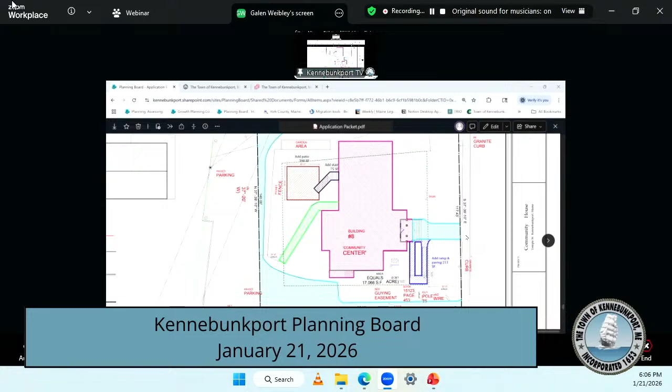So the west is towards the River Green, towards South Church, up towards Church Lane. If I'm looking at the front of the community center, the post office is behind you. So you're looking at the front of the community center. The west side is where the right-of-way comes up from the parking lot, and the east side is there by the Kennebunkport Inn. So we're talking about the community center, not the church itself. Correct, just wanted to clarify that.

This is their proposed layout for the new ADA ramp right here, and you'll see they have this patio area back here. Where's Temple Street on this again? Temple's right here, where the cursor is over on that side.

So essentially the stairs, the new ramp is gonna be right out in front. Correct, so this is the existing layout now - they have a lot of walk space, and they're substituting that for the patio space you saw in the second spot. But the ramp they currently have is to the north, right here, and they're making it more conforming by bringing it in through the setbacks on this side.

I know the memo from the planning department does have a question about clarifying the pluses and minuses on the coverage, but it looked like to the first order, it's a wash - you're taking out as much as you're adding, actually adding back just a little less.

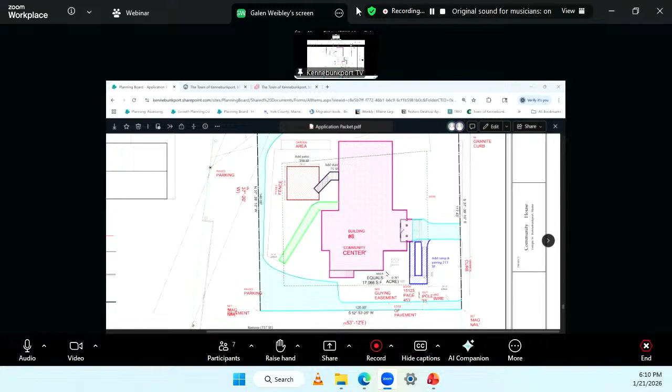Is there a bit of a slope in the back? There is a little bit of a slope, so we're figuring about 2 or 3 level tapered landscaping blocks that will need to go in. The location of that could vary just a little bit depending on how we navigate that, and it doesn't show it there, but there's a very large tree and we obviously don't want to impinge on the tree roots, so that's a little bit flexible in terms of exact location.

Is it fenced in back there? There actually is no longer a fence. Okay, used to be at a daycare, right? Long time ago, yes. We've talked about putting in a fence because there are a lot of people from the inn who park on that grass in the back.

Thank you. You're welcome. Any other questions? Just the ones noted on the memo by the town staff, like announcing any changes to parking, any changes to drainage, all that kind of stuff.

No, the parking stays the same in the back. Drainage, as I said, we're going to drain so it's on the church property. No new signage, no lighting. The only thing in your packet was a light that will be put on the ramp, just to the left of the front entrance, that will be motion sensitive to light up the ADA ramp.

Did you get a chance to look at the memo from the planning department? I did not. I know if Nadia were here, I would ask her to go through it. I'm happy to go through it if you want. If you don't mind, I think there's some good questions in there, all answerable. Yep, I wouldn't mind. I have a paper copy.

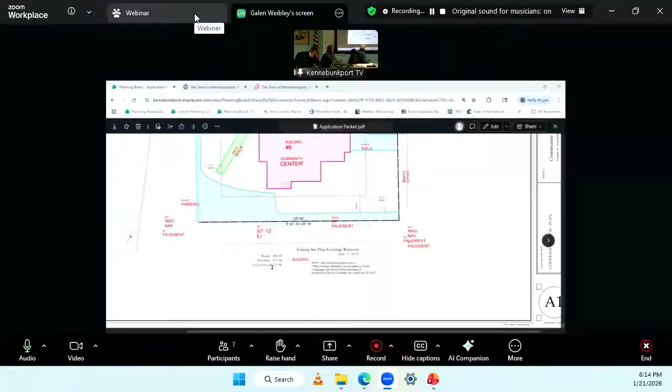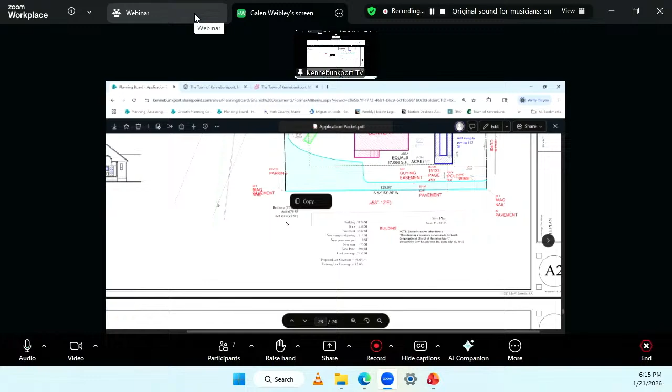On this application here, we're noticing down at the architect's existing site plan coverage removed, he's mentioning a total removed of 757 square feet. Where's the other one at? Up here you'll see this note says we have the 757 removed and we're adding the 678, so it's a net loss of 79. That looks good too. So I think that was the discrepancy, just wanted to confirm that.

I think that's consistent with what you're saying, that you're not adding back quite as much, even when you include the pad. Right, so we're removing 757. We indicated 678, but I noticed after I submitted it to you, he forgot to add back in the 8 for the pad, so plus 8 it's 686. Okay, and that'll get fixed on the plans.

The next item is there's no contours listed on this plan, so for the topographical there's nothing there. That's part of the submission requirements. Okay, so that would have to be added. Is there an easy way to do that? Yep, so I can show you, the town has a GIS service.

So when you go, I'm doing this quickly, but right on the front page you'll see there's a GIS map. And when you click that, what this does is it gives you access to all the town parcels. You just type in your address and it'll take you to it.

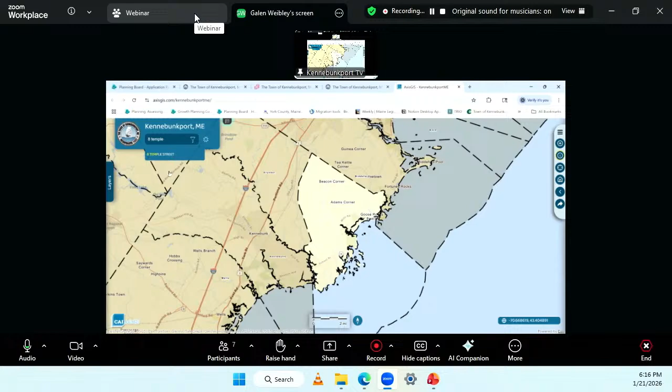And then over here you have this left-hand layers tab. Just for public education, there's a lot of good tools on this side. You can see zoning, shoreland, put all kinds of different buffers on if you want. The one you'd be interested in is under the state data, and it's alphabetical so you just look for contour. Just make sure the 2-foot markers are clicked.

And that should give you the contours. It does take a little bit of time to load, but once it loads you can zoom into your property to how you like it. And then on the right-hand side, I have the zoom cursors on my way.

There is a print function. You just hit print the map, and that will load a PDF for you to print out and include in your packet. Okay, thanks for the tutorial. There's two things, there's one.

So that is that section. Let me go back to the list here. They didn't have a parking plan submitted, or loading, unloading, like where construction is going to take place.

This could be just a simple narrative. You just need to explain where you're going to unload the materials and where construction is going to take place. That's just a narrative, it doesn't need to be anything more, dumpster location, that kind of thing as well.

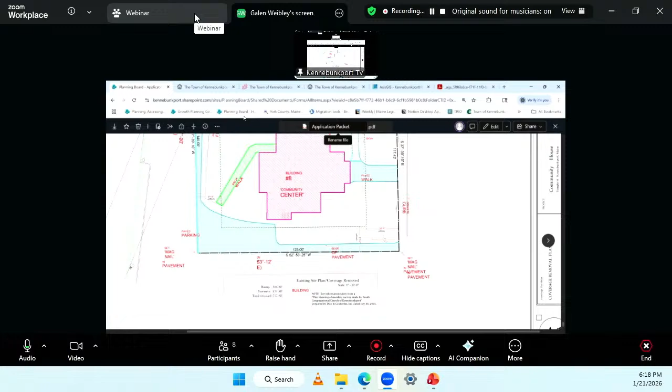We looked at the plan, we didn't notice a location for water lines. Again, it's just a concern for construction-wise, like where those water lines are at, to make sure that where your construction's taking place is not going to have an impact.

Yeah, I talked to the water department today, actually. One of our church members works there, so we're going to do the dig safe and they'll do the water lines as well. Okay.

The other thing we noticed was in the cover letter there were proposed French drains. You mentioned it was in the front lawn area. I would just indicate a box or whatever where that French drain is going, just so that they're aware, they know where it's at, where the outflow of that is, where it's going.

Landscaping, there was no landscaping plan for the area. Again, that could be as simple as you responding saying we're going to take any of the area, like the sidewalk areas that's being removed, and replant it with grass, vegetation, whatever the narrative is. It's more of a narrative response.

And again, I did send this memo to your email, so if you didn't get that, let me know. Yeah, I didn't receive it as of 5 o'clock. Okay, yeah, it was last week. Oh, okay, so you got the wrong email, we'll resend it then, just so you're aware.

Let's see here, lighting. So for the lighting on this application, what staff noticed was the proposed lumens that's proposed for this location is greater than what the ordinance allows for. You can use the lumens that you're proposing, we just need to know the height, like how high this light fixture is going to be, to make sure it's in compliance with our ordinance.

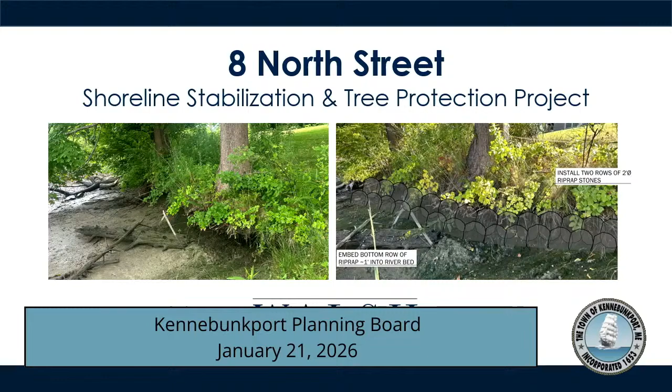I've got a PowerPoint up here with some photo references and bullets. Big picture: 8 North Street is located on the Kennebunk River, with 475 linear feet of frontage on the river. It's just up the street from the one we just talked about. You can see the Cape Arundel Golf Course here too.

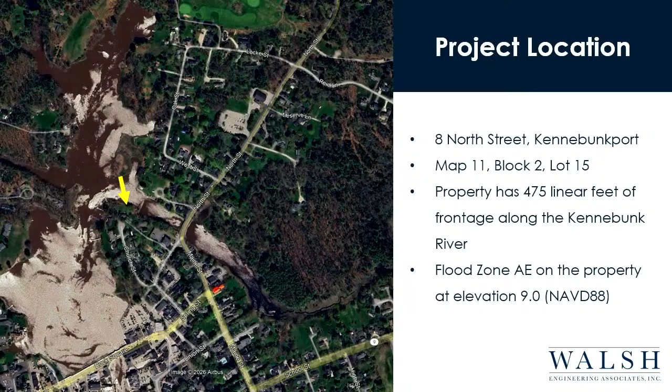There's a flood zone AE on the property, elevation 9. Let me talk through the project need. On the right are pictures of the shoreline embankment at the property, the toe, the bottom of that embankment. There's significant erosion and scour at the toe. You can see mature trees, two of them in that top photo — because of the scour, the area beneath the root ball has been completely eroded, leaving a 12 to 18 inch exposed space beneath them. Those trees are at risk of tipping and collapsing into the river, and one tree along the shoreline has already fallen in the past few years. So really we're looking to protect the trees and stabilize the shoreline here.

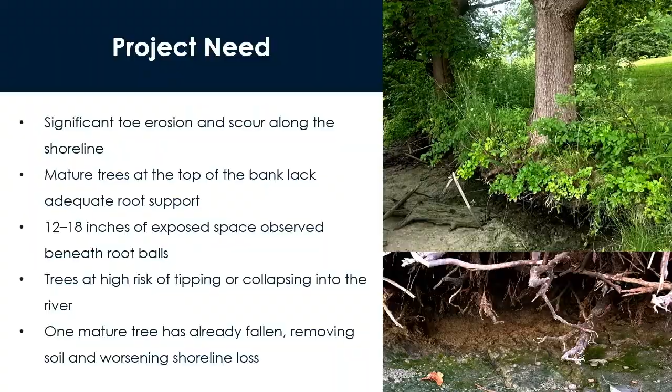This is a plan view of the property, showing the area with the undermined trees. It shows the flood zone elevation of 9 in red, and the highest astronomical tide elevation of 6.5 in blue. This is the remains of the former gristmill dam, and the gristmill properties just across the way. We'll go to the next slide.

What we're proposing is to backfill the void area beneath the trees with gravel. There will be 102 linear feet of riprap added to the base of the shoreline embankment to protect it from future erosion after backfilling. Up gradient, there'll be a 10-foot wide native vegetated buffer — there's already native plantings there, but anything disturbed during construction will be replanted with native vegetation. The goal of the project is just to prevent tree loss and stabilize the shoreline.

Going back to this figure, the problem is that the Kennebunk River is tidal. As the tide comes in, it rips around the grist property, and as the tide goes out, it rips around again. So during the tide cycle, during high flows of the river, you're getting continuous erosion of this area because of where the former remains of the gristmill dam are.

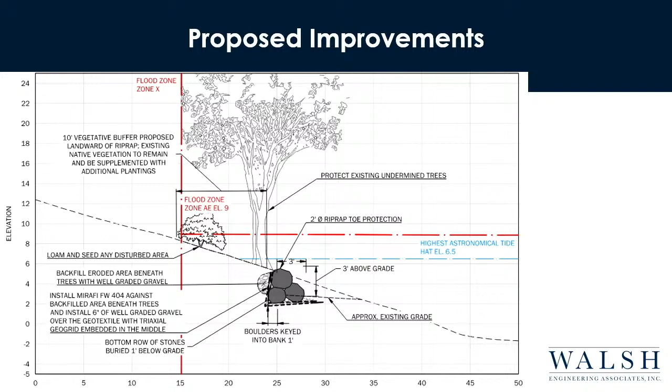Really quick, on project permitting requirements: because we're within 25 feet of the highest astronomical tide, we needed a NRPA permit from DEP. We got that permit by rule approved last week, and I'll be submitting that as part of a response to the staff comment letter we received. I'm here for site plan review, and then once we get this approval, we'll move on to activities and land use and then flood hazard permits. We're hoping to get this constructed as soon as possible, hopefully while the ground's still frozen.

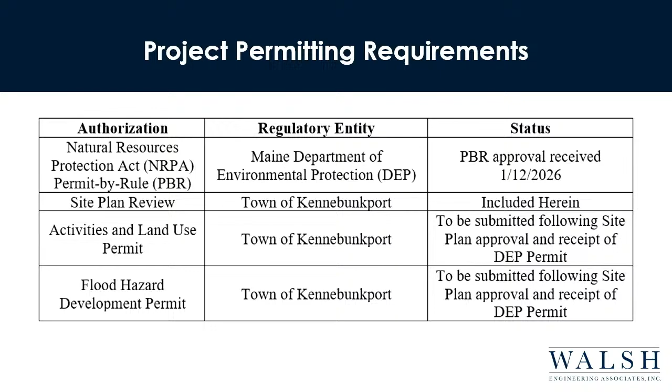I wrote down the site plan review comments here, but I don't know, Galen, if you want to work through them, talk through them. Just a quick question and comment.

Does this property own the gristmill dam works? No, actually, it does own the dam. The dam, but not the gristmill property, it's just the way. Right, but the dam is owned by them. Confirm - yes, the dam is part of the property.

If memory serves from canoeing along there, there are pieces of ledge that have not eroded, but you're in effect creating an artificial ledge, extending it.

You have to go up to the microphone and identify yourself. I'm Peter Warren, I'm the owner of the property, along with my wife.

The places that you've seen that are ledge are perfectly fine - they've already been scoured away, and there's some mud that just accumulates there. Up the creek a little bit from there is where the erosion is, and as Laney said, it's the tidal action and also wave action from boats. We've all been up the creek at some point.

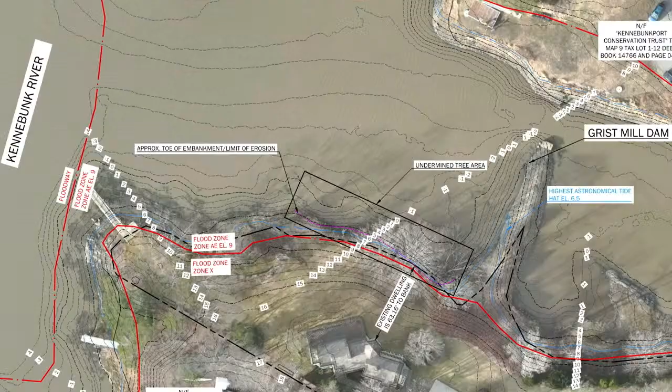Can you say something about how you're gonna bring construction equipment and the boulders in? What are you thinking there? It's actually right behind you. There's a different screenshot where you can see the driveway, and the construction access road was marked in red. We're gonna come right off the driveway, access down around this tree, and then get equipment in.

The trees are gonna be an obstacle. We might have to get a little creative, like work it from the side, if we can get an excavator down over here and try to place rocks in front of these trees. We'll work with the contractor on exact means and methods once one is selected, but that's the game plan: bring everything from the driveway down, then work it with a small piece of equipment.

Nothing stored out on the road? Nope, everything will be on the property.

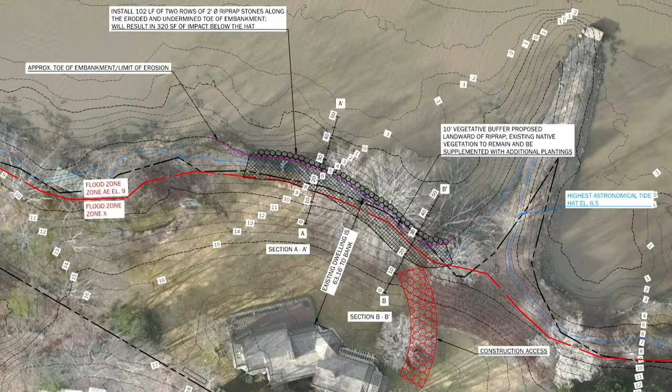Galen, would you mind taking us through any outstanding comments on the 8 North Street memo? Absolutely. So the first one was just the abutters letter, just having both owners sign off on it.

Perfect, yes, I'll submit that on Friday. He's got it right there. Good work. Next one was the deed that was provided; there were a few easements in there as well. Yes, we'll be submitting an updated plan set showing both of those.

And then setbacks from the bodies of water and lot lines. We noticed the setbacks haven't been identified for the project, unless I missed it somewhere. No, they're not on there, but they will be on the upcoming plan set.

Existing features - the planning board should confirm with the applicant that none of the trees on the plan are 8 inches in diameter or greater, which would require labeling. Clearly the ones shown in the picture are of that size.

Those are the ones this project is kind of addressing. Maybe in our updated narrative that would be fine.

Are there others you need to be particularly careful of in the driveway? No, it's really just those two down on the shoreline, which we can label the size and type of on the updated plan set, but we would request a waiver to labeling all the rest of the trees on site. Not a problem.

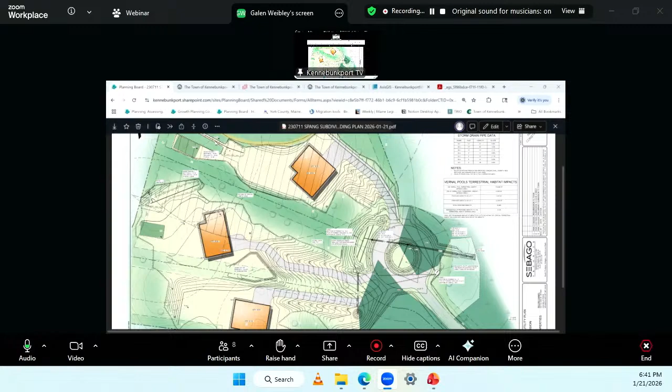There has been a plan change since the last time we were here. You can see that the 100-foot buffer is shown from the vernal pool, and we've pulled everything out of that area. Thank you, Rob, he took care of that for us.

That was the only outstanding major issue last time that we needed to address before tonight. I did address a number of comments from one of the neighbors at the last hearing, but I'm happy to recap any of those. And just a reminder, we have a few waiver requests that we're hoping will get voted on tonight. I'm happy to answer any specific questions if you have them.

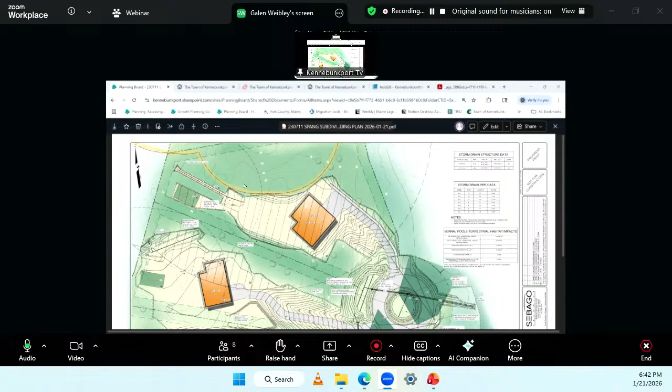I don't have any additional questions. Do you want to come back for those waivers after we open it for public hearing? Anything from the code office? Nope. Is there anyone in the room or online here to speak to this? I'm opening the public hearing, just to be clear. We have 5 attendees, but no hands raised. All right, then I'll close the public hearing without any public comment, which is fine.

Let's go on to address the concern we had. Remind us which waivers we're talking about. One was a hydrogeological study, another was the high-intensity soil study, and then we had road waivers. There was some conversation, and Galen should shed some light on this, but we have the road being centered within the right-of-way, because it's already an existing condition and it's not centered, so we need a waiver for that, and then the width of the roadway. Galen said we might need both of those waivers twice for different sections, one for site plan and one for subdivision standards.